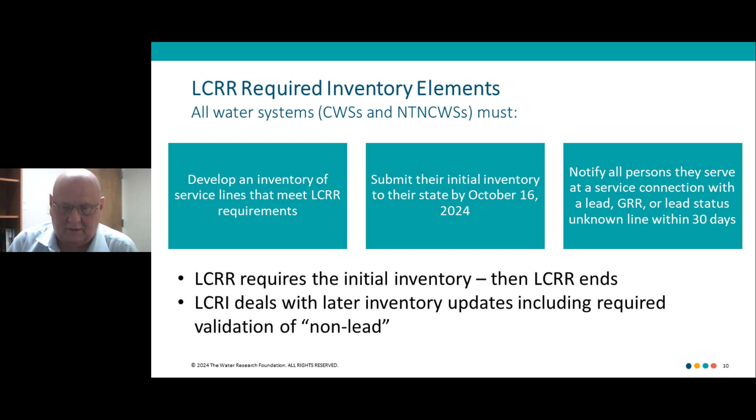So the service line inventory requirements outlined in the LCRR are to complete it by October 2024. And when those are identified as either lead, galvanized pipe requiring replacement, which means it has a lead pipe between the galvanized pipe and the water main, or if you have an unknown pipe, you have to notify the customers of that within 30 days. The LCRR then stops, and the LCRI starts after that with updates and verifications that your approaches to doing the inventory and the replacements are correct.

The service lines that are identified are lead lines, galvanized requiring replacement, unknown pipes where you can't determine it, especially by records review, and then the others are the non-leads, which are copper, plastic, etc. And that's the focus of this presentation.

So to identify something as not lead, you need to either do records review or two-point visual inspection, and that, of course, is a very intense and involved process. So start off mostly with a records review to see whether you can classify it as not lead, or if your records review says it's lead, you can put it in those first two groups. And if in your records you can't identify whether it's in those two groups, it goes in the unknown group. The unknowns have to be treated like LSLs and GRR in terms of public education, but you do have to go to the next steps to evaluate what to do with those unknowns.

So with the unknowns, you have to develop an elimination strategy. How are you going to evaluate those unknowns and determine whether they're lead lines, GRR, or not lead? And this needs to be done within 10 years. And before that 10 years, at 7 years, you need to have some evaluation of how that strategy is working. This determination in your elimination strategy can be anything that's state approved. So it could be lead sampling, it could be artificial intelligence, it could be one of the in-pipe methods or other emerging methods that can identify the lead material.

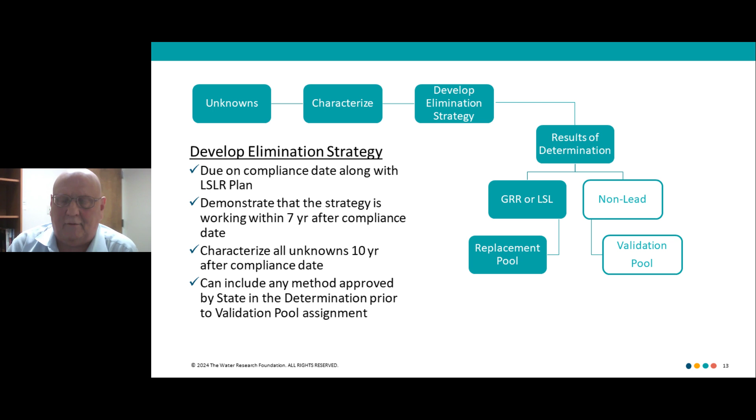And when you get to the end of that, your unknowns will either be in the lead group, either a GRR or an LSL, which means it goes in the replacement pool, and those pipes will be replaced within the next 10 years. Or if it's not lead, it goes in the validation pool. Now at that point, it's still not classified as a not lead pipe because you have to go through additional steps after it gets in the validation pool, which we'll discuss next.

So in the validation pool, it is not considered a not lead pipe until you do either records review, which you've already done in those previous steps, or the next thing you can do is a 2-point visual inspection. Now that would be very onerous if you had to do every single pipe, though that is one option. You can go to every single place that is identified as not lead and do the 2-point inspection.

But there is another option where you do a statistically significant portion of those sites and evaluate those sites. If those are all not lead, then you can say that the whole group, all of the ones in your validation pool, are not lead. Another possible outcome is you do find one or more lead pipes, and then that's up to what you discuss with your state, because currently it's not defined.

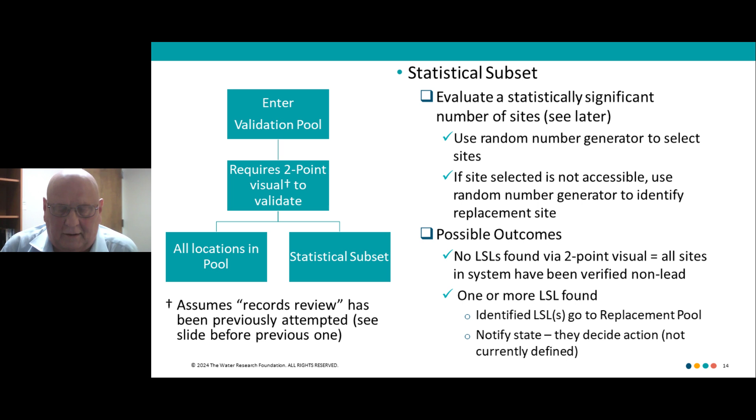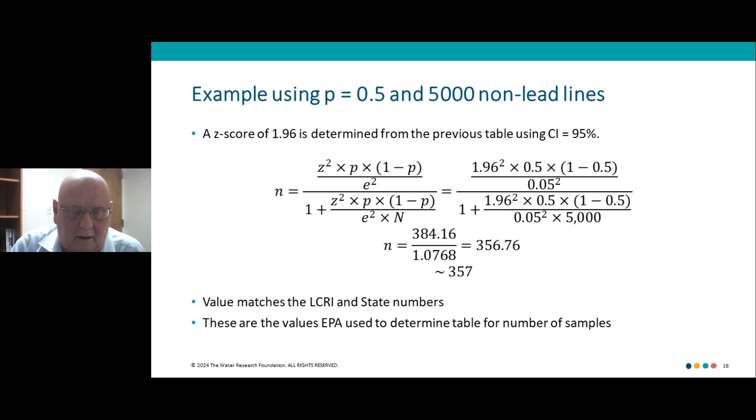And this number here in this equation is identical to what's in the state numbers and in the LCRI. This p-value that's used, again, 0.5 is the most conservative because it assumes that you have non-uniform distribution of all of those sites in your validation pool. But if you have a better indication of what are the characteristics of the locations in your validation pool, it may be appropriate to use a higher P.

Like if you knew that 85%, as shown in this slide, then you could use a value of P if you were sure that 85% of your locations had similar characteristics. Now, currently using another value of P would require state approval, or if it's modified in the final version of the LCRI to allow those other values of P.

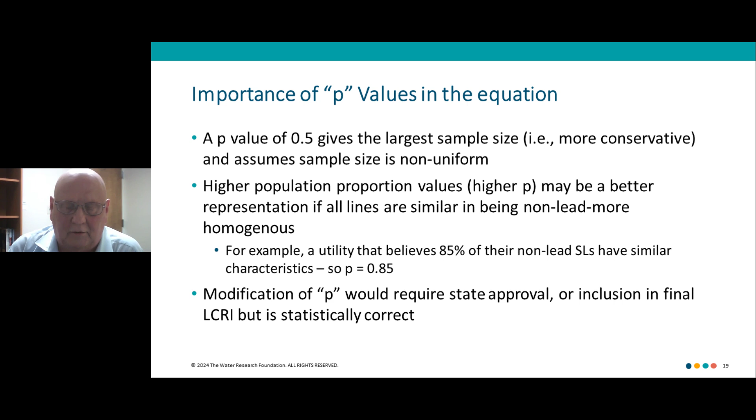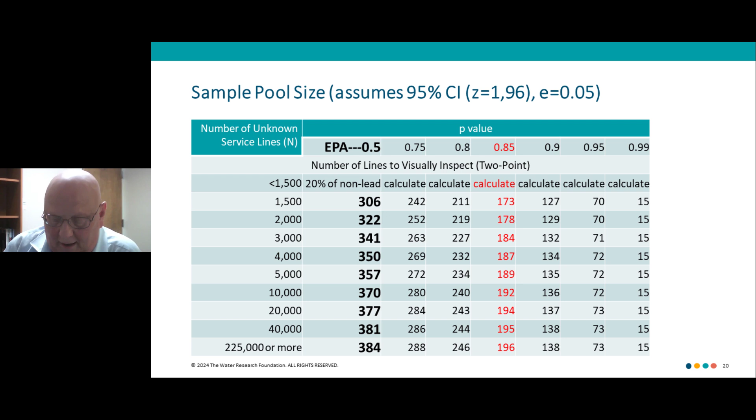This table shows the number of locations in your validation pool in the left column. Next to that is the value of n that we calculated with the p-value of 0.5. You can see at 5,000, it's 357. And these other columns show different values of p. So if you are at 0.85, like in the previous example, with 5,000 in your validation pool, you would look at 189 instead of 357. And if 189 were not lead, you could say that all 5,000 were not lead. But again, that requires state approval.

So if you don't find any lead service lines, you can again say all of the validation pool is not lead. But if you do find some LSLs, first of all, you have to either replace that LSL or put it in your replacement pool so it can be replaced later within 10 years. Also, you can use the characteristics of those sites that have LSLs and try to investigate other sites within your system with similar characteristics to see if those are LSLs. Meanwhile, you can redo the pool a second time to see if you can designate the rest of the validation pool as not lead.

So we'll get to hear Susan Teefee talk about the utility perspective in the next slide, but some summary of this presentation. Again, doing the 2-point visual inspection is difficult. You can use the statistical methods to look at a smaller subset of those sites to make it a more manageable number. State approval is required if you do things differently, like using a different value of P, and for doing the evaluation of the unknowns, but that is possible, and you will need to work with your state to come up with the best approach for that. So again, Susan Teefee from East Bay Municipal Utility District will now talk about the utility perspective on some of these same issues.

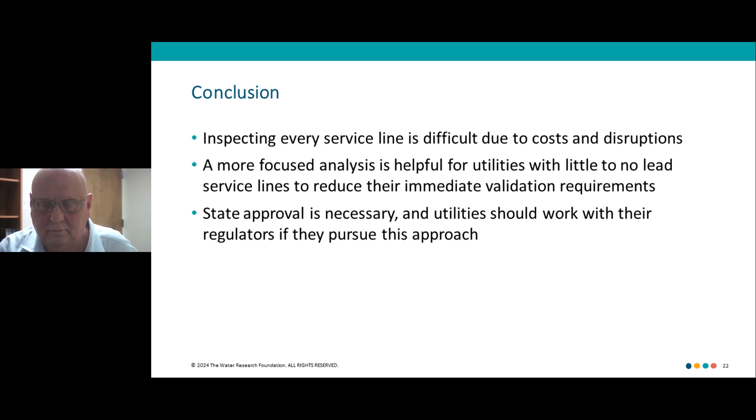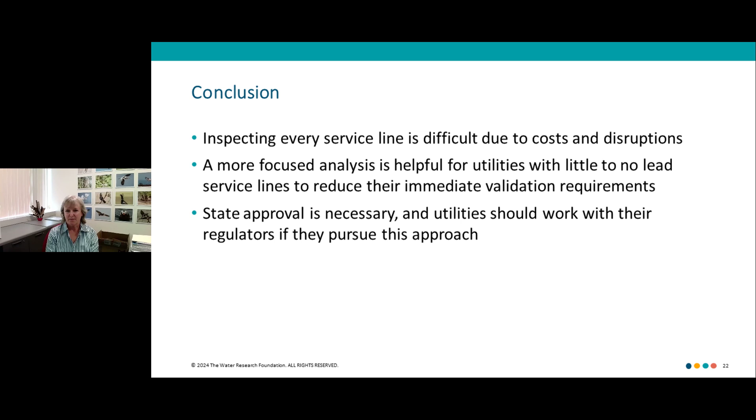Thanks, Richard. I am going to move to the next slide here. Can you see that okay? I'm going to jump right into the utility perspective.

Some additional background about East Bay MUD. We have about 1.4 million customers that we serve through roughly 385,000 service lines. We have a really clear delineation between the public side and the private side. Generally speaking, we'll have what we think of as the public side, a district service line that comes up and terminates at a water meter, and then from the water meter into the house is the private side. They're legally very separate for us, and it's common to install our side, the district side, and set the water meter a long time before the house may be completed.

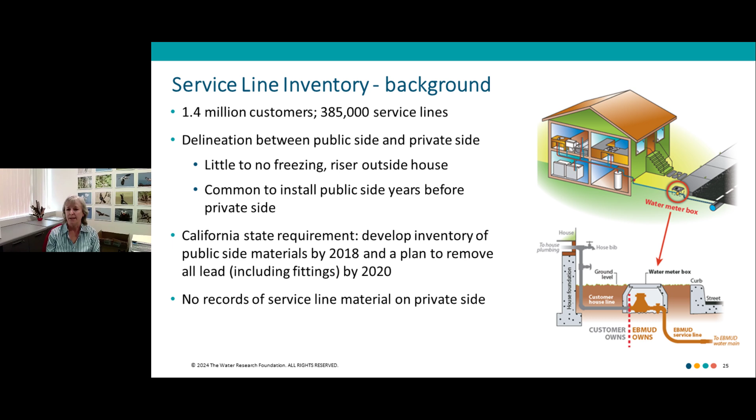And then, kind of like in the LCRI, we had to have a plan to remove any remaining lead materials. But unlike the LCRI, that includes fittings. So we've been working on that for a little while. For us, we have pretty good records of our service line materials on the public side. They are paper records, and so it's pretty labor intensive to review them.

But like Richard talked about, the AI methods or machine learning or statistical methods, we didn't do any of that. It's really just low-tech reviewing of records. We did develop a plan of how we're going to create our inventory and submit it to our regulatory agency, and they did approve that before we got started.

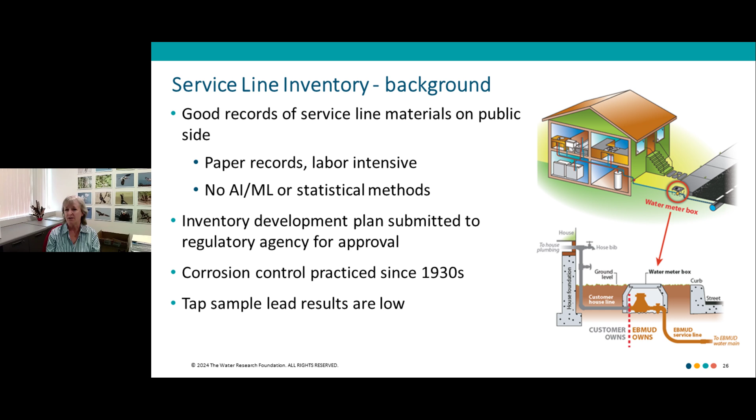So looking back at our history, we do know that we installed lead service lines for a period of time. And it turns out that there's a pretty bright line between 1942 and 1945 when we did install them. There was a War Production Board that regulated everything apparently during that time, and copper and steel were pretty much unavailable due to the war efforts. But in our area, there were a lot of shipyards and Navy and Army facilities, and there was a lot of pressure to provide housing for the defense workers.

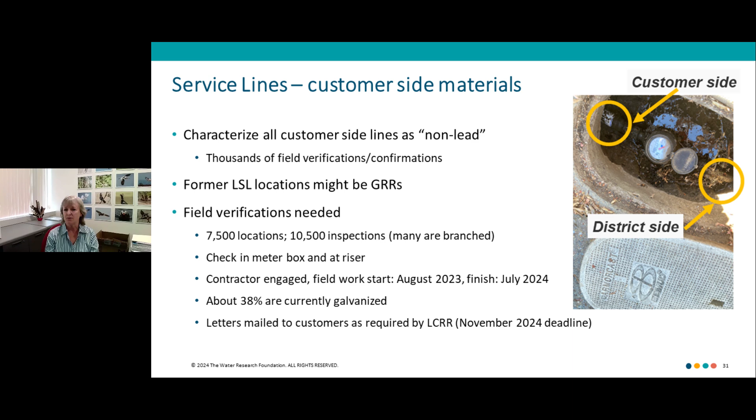In addition, we are concerned about what the compliance is going to look like at those new sites because we didn't have any data from those locations. In the current lead and copper rule, the lead service lines and copper pipes with lead solder are in tier 1, so those are our compliance points historically. In the future, we're going to have to sample from galvanized pipes with lead fittings or GRRs. That'll be tier 3. And we're not going to be able to sample from the copper pipes with lead solder. And then there's first liter and fifth liter samples.

So we started reaching out to customers that we now know have these service line materials. We've got a pool of 77 of them at this point, galvanized lines with lead pigtails. And this bottom row here, first liter and fifth liter P90 values, they're around 1 part per billion. And then the GRRs, we have about 71 of those, and first liter and fifth liter are non-detect. Even in this case, the average and the median is non-detect. There's just no lead in these GRR pipes for us.

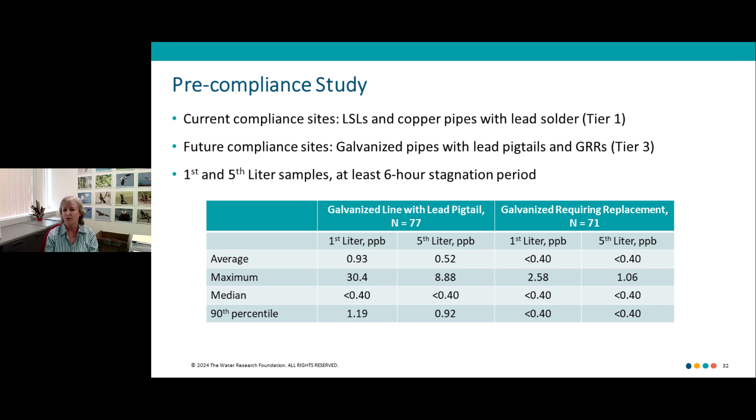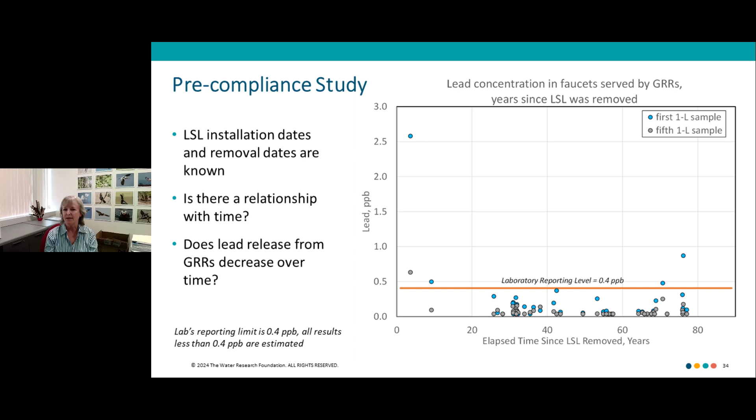This line across here is our laboratory's detection limit or reporting limit, which is 0.4 ppb. So it's possible that if we had some newer ones, we could see a relationship here, but definitely in the ones that we have now, there doesn't seem to be any change with time. They're all quite low. So some additional work that we're doing on those galvanized pipes is we're extracting some of them and sending them to EPA in Cincinnati for analysis of the scale.

We're sending 4 different types of pipes: public side, so district side galvanized pipes that still have lead pigtails today, some galvanized pipes that have copper pigtails, so those that were never exposed to lead. On the private side, GRRs that are very old, and the ones that we've sent most recently were removed more than 60 years ago. And then private side GRRs that are newer, and we're just finding the newest ones that we can.

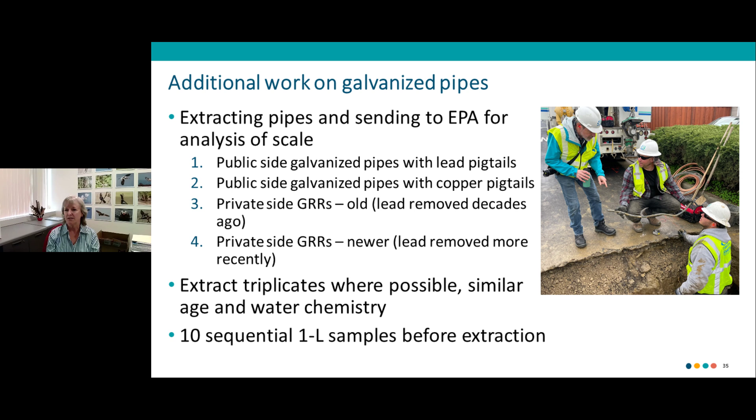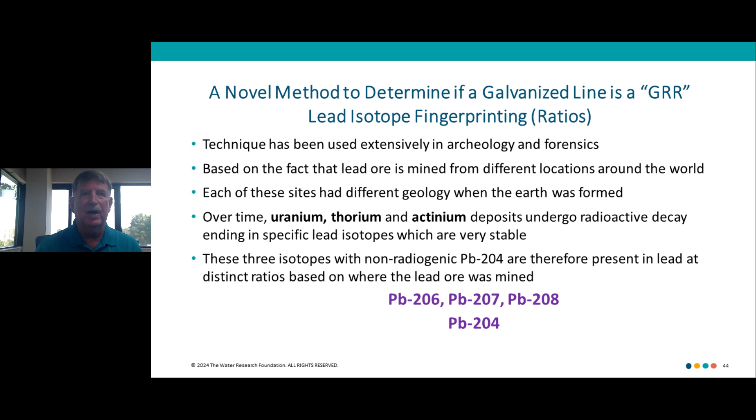And over time, those deposits that had uranium, thorium, actinium in them undergo decay to the stable leads. So these different areas of geology have different lead isotopic presence, or maps, if you will. So those stable ones are lead 206, 207, 208, and 204. The important thing here is there are 4 isotopes that we can measure now that are all stable, and they come from different places in the country and the world, as a matter of fact.

So we have a high precision lead isotope machine. It's called a multi-collector ICP-MS with multiple detectors. You can do isotopes with an ICP-MS that you all are very familiar with, but unfortunately, there's some limitation with an ICP-MS.

It doesn't give you as low a detection level. We can measure lead in the nanograms per liter. Not suggesting we do a PQL in the nanograms per liter, but with this machine, it can be done.

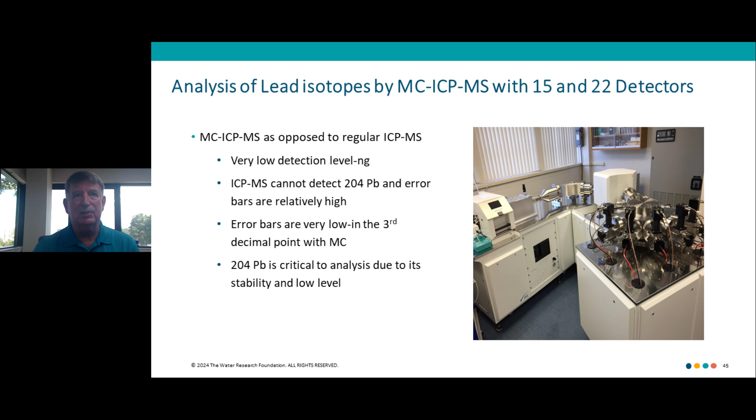ICP-MS does not detect 204, and 204 is very important to the analysis of these isotopes because it's a low-level isotope. It's different in the different geologies, and it's stable. It's not a progeny, so it's a stable isotope. So it's critical, and without that, it's really hard to do separations. And the error bars with this method are in the third decimal point, so we don't even show them on the results. Whereas with an ICP, there's lots of overlapping associated with it.

So you can see here, some of the first tests we did was gather a bunch of lead pipes from all across the country and found they all fall in a straight line. And we also did chrome and lead solder and brass fixtures, and they're all falling on this line. If they all fell in one clump, you can't separate them and see anything.

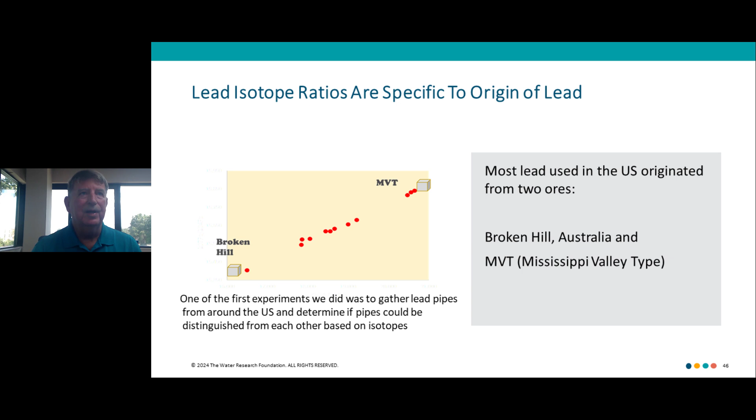So very nice. They all fell on different lines, and almost all the lead in the United States comes from Australia or what's called Mississippi Valley. It doesn't mean it's all Mississippi Valley, but that's a type of geology in the United States. And all of the lead now is mixtures of those in the United States. So this was a nice first step that, hey, the method's got some promise. We can identify these things.

The next thing we did was start doing something very simple. This is waters from Flint. I can talk about Flint because it's pretty public. This is some waters and pipes from Flint. So the little round circles are an isotope from a scale inside of a Flint pipe, and the water came out of the pipe. So it should be obvious, right?

If I take a water sample and the method works, and I take a scale out of the pipe, the two ought to match up. Well, you can see they matched up very well. They're just on top of each other. The only one here was just a little bit different, and perhaps that lead pipe had a different lead pipe upstream of it and threw those scales off just a little bit.

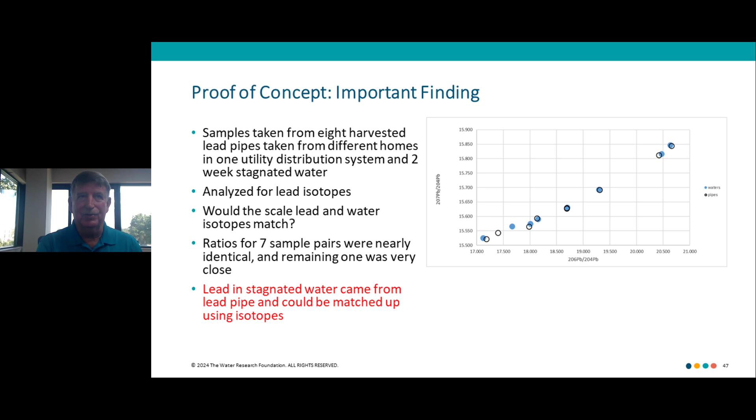So the very first thing we say, okay, hey, we can do this. Very simple basis. We can take water sitting in the pipe. There's no other source of lead but the pipe, and analyze it and the scales, and they match up. The next opportunity we had was to do some testing in copper with lead solder pipes. And the reason that came up is because this utility was having some very high lead levels, and they don't have any lead pipes. And where is all this coming from?

So this is a couple examples of things we did which furthered our knowledge in isotopes. If you look at this one over to the left, we're looking at an analysis of water and scale and solder in a copper with lead solder pipe. The solder sample was taken from outside the joint because, you know, you've seen these joints. They have lots of solder still on the outside. Many times when you open these pipes up and split them and look at the joints, the solder is long dissolved unless it was a really sloppy job. So you don't see any solder inside of these pipes.

But where was this lead coming from? So you can see these were right on top of each other. The solder isotope from outside of the pipe, the water coming from the pipe, and the scale, all from the same lead source. And so all of the lead in this scale came from the solder. And what happened, it turns out from some other analyses, is the lead solder years ago dissolved off through galvanic corrosion. Some of it went to the tap, some of it got caught in the scales, and then that lead, which was now lead 2, it's not solder anymore, it's now lead 2 in the scale, was trapped.

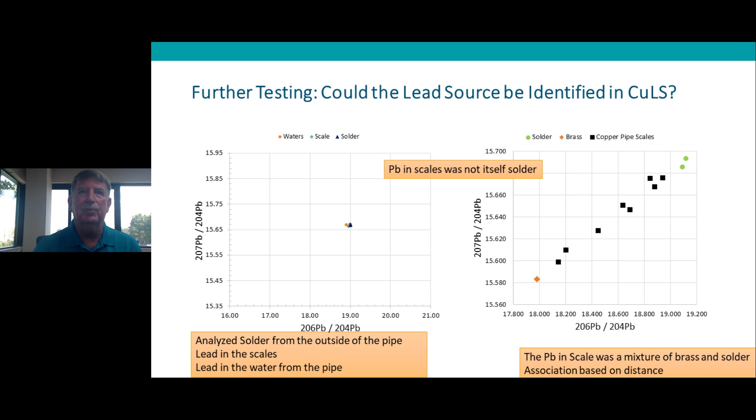And, you know, in here, we've got an almost equal influence of the two types of lead source. And here, we're getting more and more towards the sources that are close to them. Just another along our way of what can we prove and what can we see with this.

So testing galvanized pipes. This is, whoops, I always do that with my arrow. And I always forget you can't see my pointer, so I hope I'll do a little better.

Almost all of our galvanized pipe came from what's called prime western grade galvanizing. It has, I said 1 to 2% because we kind of find that. The standard is supposed to be no more than 1.4%. So the galvanizing has lead, but the thought is more is going to come from the lead pipe upstream.

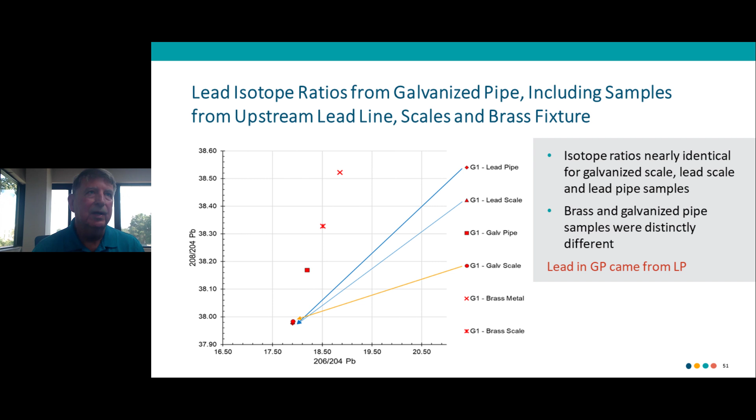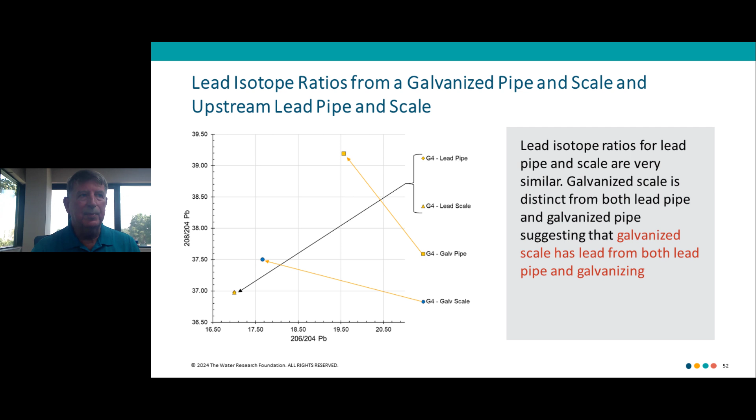It's intermixed. And we also have a couple of these where it's not from the lead pipe at all, even though the lead pipe is there. But the vast majority of the ones we've tested fall into that category: the lead in the galvanized pipe came from the lead pipe.

So let's get to this question now of can we identify a GRR? What would we need to be able to do? Well, we don't want to take the GRR out and then figure it out. We've already taken it out. So we need to be able to do it in situ without harvesting the pipe.

Somewhere we need to be able to access this galvanized pipe because we've got to collect a small sliver from outside of the pipe. So in the home, at the yard valve, somewhere we've got to be able to get a small sliver from the outside of the pipe, not the inside. Then we collect a sequential water sample corresponding to the galvanized pipe location and look at those isotopes.

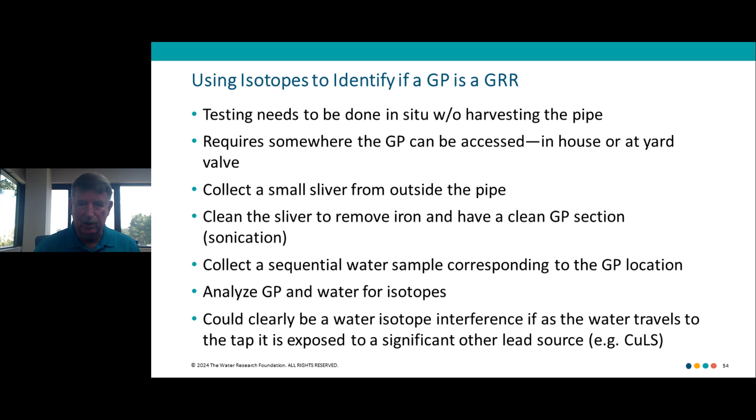Now, it could have picked up lead somewhere else in the house. It could have another source of lead as the water sample moved to the tap, so it could be a mistake classifying it as GRR, but that's what it appears to be.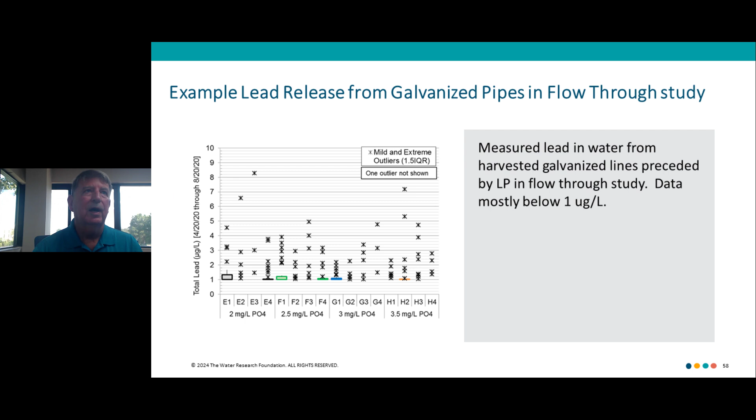So in summary, high precision isotopes are really proving to be valuable. In fact, we're moving now towards children's blood lead levels being checked with isotopes to determine the source in the blood. And certainly there's a lot of potential to decide if something is truly a GRR or not as we move forward. So with that, I know we've used up some of our time, Jan, but hopefully we have some time for a few questions.